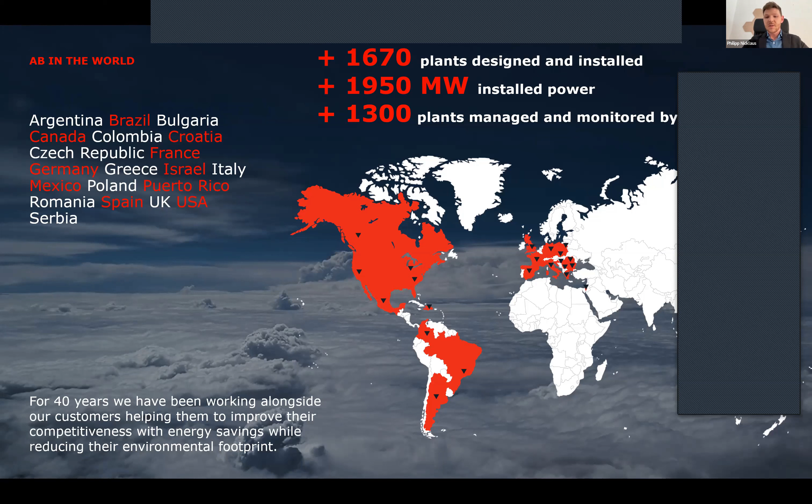The portfolio which we offer is quite limited, so to say - we have three main pillars. First, and the one we'll focus on today, is our cogeneration unit, the EcoMax - it's the name of our modular solution. Then the newest addition to our product family is the biomethane upgrading unit, which can upgrade biogas to biomethane, which can then be used in CHP units or fed into the grid. This is a new product using the membrane system we have developed and already successfully installed in many countries. The third pillar is the air emission treatment system, where we produce ourselves SCR systems or RTO systems to comply with emissions, especially for the cogeneration units.

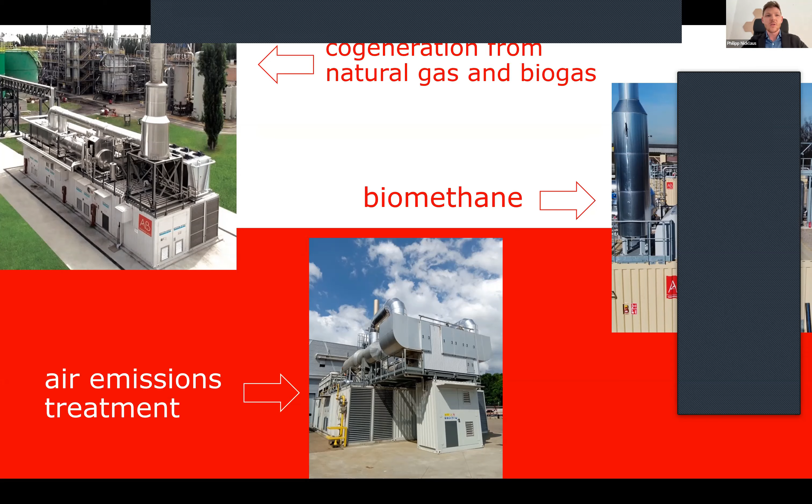I'm jumping now to the case study, but before diving in, I wanted to touch on the heating sector in Germany as a whole. Mr. Sadamori already mentioned it - it's a sector where most countries are lagging behind when you compare it to the energy transition in the electrical energy sector. Mostly the focus is on the electrical energy sector, and I was quite surprised, to be honest, when I found out that half of the energy in all of Germany is used for the heating sector alone.

This includes cooling, and is spread over all sectors like private households, industry, and trade and commerce. But it's still the biggest chunk of energy when we speak about final energy consumption in Germany. It's like a sleeping giant, I would say, because the focus so far was mostly on the electrical energy market. The heating sector, when we speak about energy transition - and Germany is very keen on doing it, wanting to reduce greenhouse gas emissions by 65% by 2030 - therefore the heating sector has to contribute its part.

Therefore this district heating network, as a part of the heating sector, is a key player, because many industrial sites or households are connected to one of those district heating networks. So when we make one of those more energy efficient, then all of those connected to this district heating network will automatically benefit. This is a very easy way to affect many industries which are connected to it. And also in Germany, there was a decision that we will phase out of coal very fast.

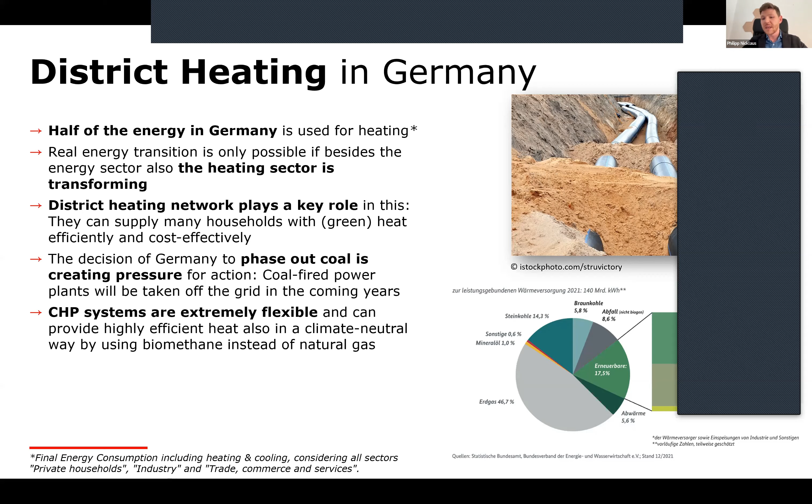I will now jump into this case study I want to present. It's a district heating project from a utility placed in the middle of Germany. The frame conditions we got as an initial point is that the company wants to substitute a very old CHP unit and extend an existing district heating network with around 5.4 megawatt electrical and 5.3 megawatt thermal power. On the right side from this Google Maps top view, the red square is the place dedicated for this new CHP unit.

So it's a very limited place where we had to design our system for. Also, you can see this on the right side down here - there is a school next to it, where we have very high sensibility on the sound emissions which we will produce with our unit.

Hi Philip, excuse me, hi, it's Ben from COGEN Europe. Just to say that we're not seeing your whole slide - there seem to be some blocks on the slide. Are those maybe - I don't know if you have any windows open. Yeah, that's made it much smaller. Okay perfect, thank you, and there's another one at the top of the slide. I don't know if - but anyway, that's fine now. We can see everything, thanks. Perfect, sorry for this, good that you mentioned it. Let me see if I can make this disappear too. See, full screen - somebody has a tip. But anyhow, on the top there are not a lot of information, so I hope now you can see most of it. I thought this was disappearing. Yeah it looks good now. Thanks, okay thanks for the information.

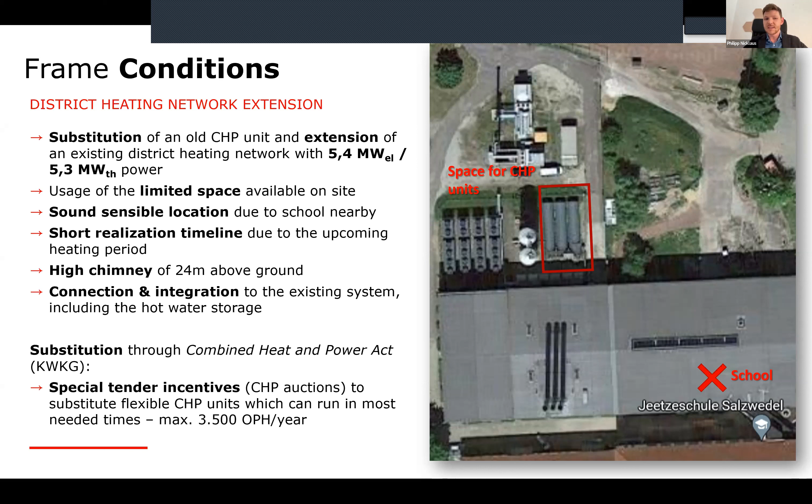When we look towards the substitutions aimed for in this project, we are speaking about the Combined Heat and Power Act, the Kraft-Wärme-Kopplungsgesetz, the German word for it. There is a special tender incentive for such projects - it's via an auction where the bidder places the amount of cents per kilowatt hour he would like to receive additionally, and only a certain amount of the lowest bidders will get the substitution. It's a very complex system. One limiting factor you have to fulfill to get this additional subsidy is that you can only run the unit 3,500 operation hours per year, which is very low and may seem strange to some of you. I'll jump into this topic later and explain why this is the aim from the German government and what's behind it.

So in order to fulfill those technical requirements, we went for our EcoMax solution, which is our CHP solution. It's a containerized CHP solution which can cover a range of 250 kW up to 4,500 kW per unit. Multi-unit or module versions are also possible, like in this case. Like CHP in general, but also our solution in particular, we can design the system extremely exactly to the needs of each customer. So when there is a hot water need, or a cold need, or a steam need, or a certain sound or emission requirement, the CHP systems can be modularly adjusted to all needs, also in different countries and temperature levels. This affects the design of the system, and this can be very well reflected with our engine-driven CHP solution.

We have developed such solutions for a very long time, so we put a lot of thought into the solution. The biggest downside people would comment on with a container solution is accessibility.

Over the decades where we were redefining our solution, we thought about this factor, and we installed a lot of accessibility via doors on the sides of the container wall. You can see this here, so that you can maintain and service the engine properly, because this is the longest period where we will interact with the engine.

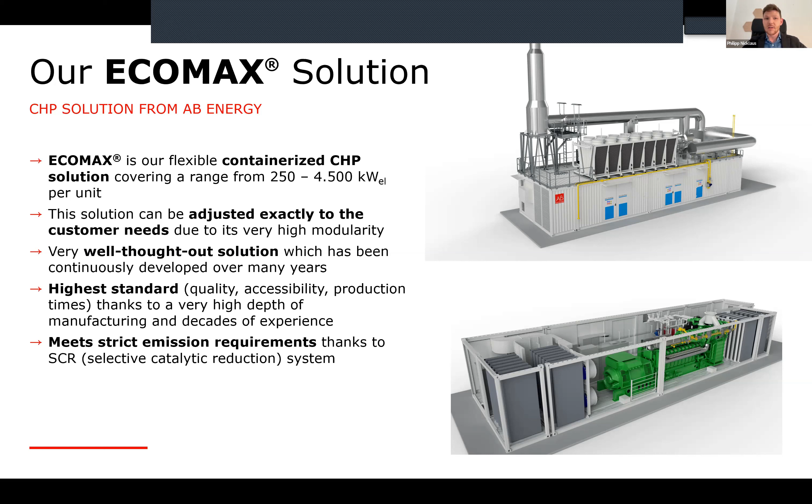Also in regards to emissions, there are solutions to fulfill every requirement in each country. In Germany, it's mostly focused on NOx, so we had to install an SCR, a selective catalytic reduction system. This particular project solution was 2 times our EcoMax 27 natural gas unit, with a Jenbacher gas engine inside, a 616 series, and each CHP unit produces 2,678 kW electrical and 2,582 kW thermal.

To meet the very strong requirements on sound emissions, we had to install, in addition to our super silent container which already has reductions like special frequency converters, thick panels in the container walls, and a special silencer, a sound barrier around the unit.

You can see this in the picture down here. This was around 6 meters high, to reduce the sound pressure level to around 50 dBA at 10 meters. Also, due to space limitations, we had to install most of our additional components on top of the CHP unit.

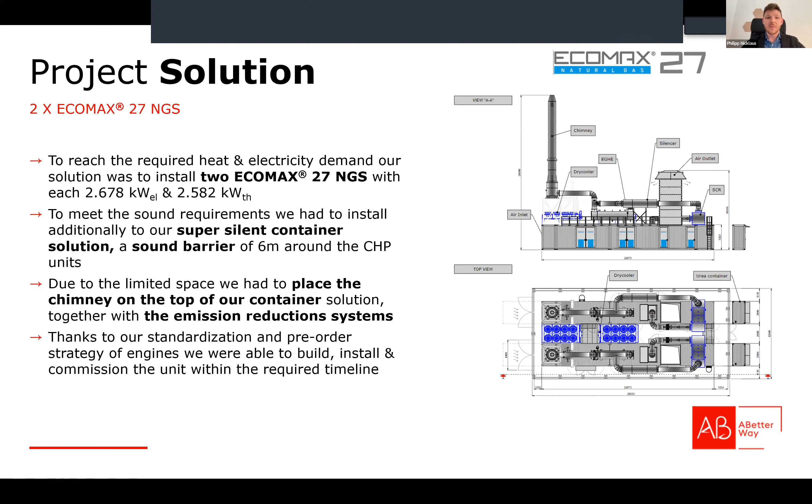We're speaking about the hot water decoupling system, the chimney, which was 24 meters high in total, the air inlet, and the SCR, so all components had to be placed on the container. The wall itself was designed so that we can deconstruct the engine and the container if needed, but this normally happens not before 60,000 to 80,000 operation hours.

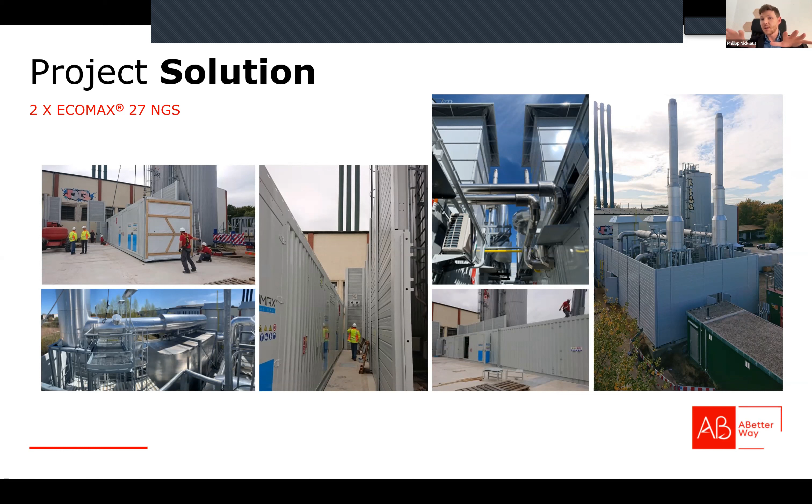This is the solution as built. You can see the project in different stages: on the left at the beginning of the installation, and on the right side the finalized and commissioned system. It's been running since then very, very good, producing the heat needed for this region in the middle of Germany very efficiently, and especially thanks to this double module solution, they can operate the plant very flexibly.

The result for the customer, for the utility, the biggest one is that they have a more efficient district heating network, so they can supply higher efficiency heat to their customers. On the financial side, they had a plannable additional income due to the subsidy which they applied for and were granted.

The limitation was, as I mentioned, that you can only operate the engine 3,500 operation hours per year, and the subsidy is only paid for 30,000 operation hours overall. So this calculates to around 8.6 years of funding period.

I assumed here in this calculation the best case scenario, so they get 7 cents additionally on the electricity sales and the heat sales. This equals around 11.34 million euros over the lifespan they can calculate with, and this makes a big difference for such projects.

But it's one of the results which the customer achieved with this solution. Another one is, in Germany district heating networks are measured by the primary energy factor, and they have to fulfill certain quality criteria. So the utility was able to reduce the primary energy factor, which also equals a certain amount of CO2 savings.

The OPEX costs were reduced dramatically due to the fact that the very old CHP units were not as efficient as the new ones, and the service costs were quite high because they were at the very end of their life cycle. So there was a major investment to be done, or a replacement, like they did at the end.

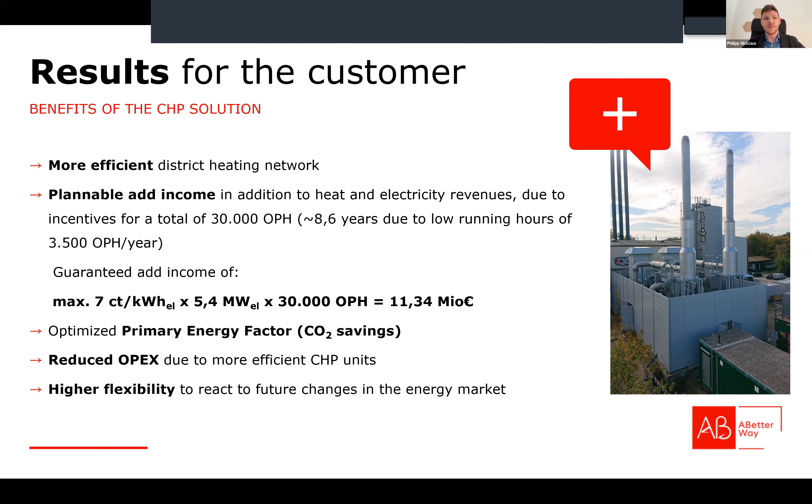The potential future benefits from such a unit, and I believe that this utility already had this in mind when they installed it. I tried to put there three statements, and I will explain them now a little bit more in detail. So the first one is more volatile energy markets in the future.

With all this increasing amount of renewable sources feeding into the energy grid, the volatility of the market will increase a lot. And this requires obviously that there are some constant and flexible energy production units which can jump in case there is no sun and no wind available.

And this is also, to close the loop, the reason why the government only grants this subsidy for 3,500 operation hours per year, because they want the unit to be operated in a way that helps the grid. So the customer can freely decide when to run it, during which periods, and he will check the energy price on the stock exchange and run the engine when the price is highest. In Germany at least, this is normally the case when there is no renewable energy feeding into the grid. So this is a subsidy which empowers them to run their engines at the times needed.

The second thing is the flexibility in the future to reduce the CO2 footprint even further. In Germany at least, there's also an increasing amount of renewable gases in the gas grid. Now with the geopolitical issues, it will be getting a boost. So I think biomethane will deliver a big contribution to this change.